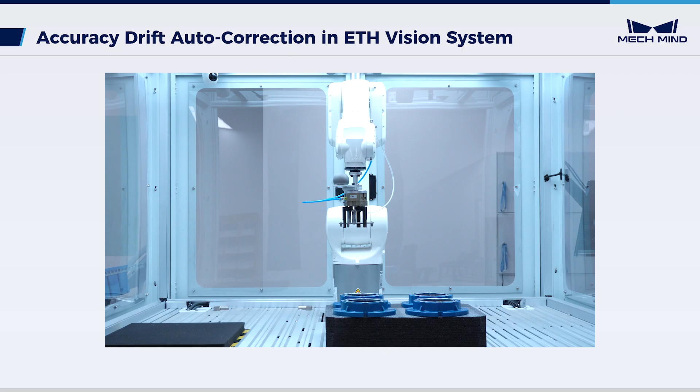This video introduces the deployment of accuracy drift autocorrection in the eye-to-hand vision system, using the example of picking neatly arranged housings. By deploying this, you can avoid decreased picking accuracy due to temperature changes. Additionally, by setting a correction cycle, you can achieve long-term picking stability.

Before deployment, make sure that the workstation has a solution for picking. Confirm that the accuracy of the camera, robot, and extrinsic parameters have been checked, and ensure the robot can accurately pick the target objects. Make sure there's enough space for mounting the calibration sphere.

Now, we can start the deployment. Here are all the steps for deploying accuracy drift autocorrection in the eye-to-hand vision system.

Let's begin with the preparation. First, check the items for deployment. Open the eye-to-hand kit packaging box and take out the items, including a calibration sphere, a soft nozzle air blower, and others.

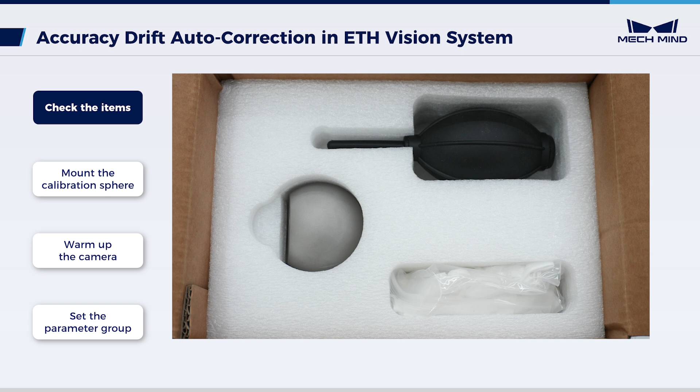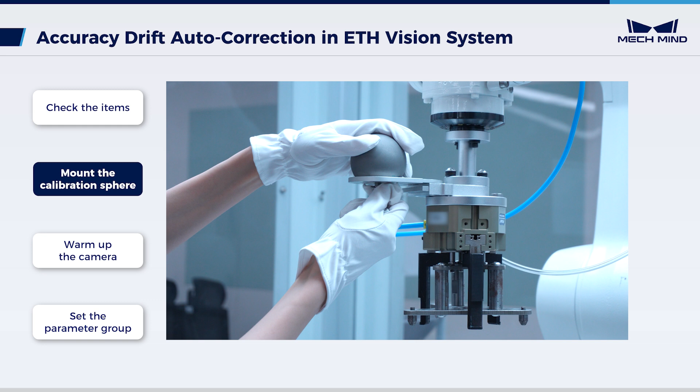Start by mounting the calibration sphere. In the eye-to-hand setup, the calibration sphere should be fixed to the end of the robot's arm, such as on a sturdy gripper or on the flange plate.

Make sure that the calibration sphere can reach all the areas where the target objects will be picked, and that it remains in the camera's field of view when moved. In scenarios where the robot needs a large or long gripper for picking, avoid any collisions between the gripper or calibration sphere and surrounding objects.

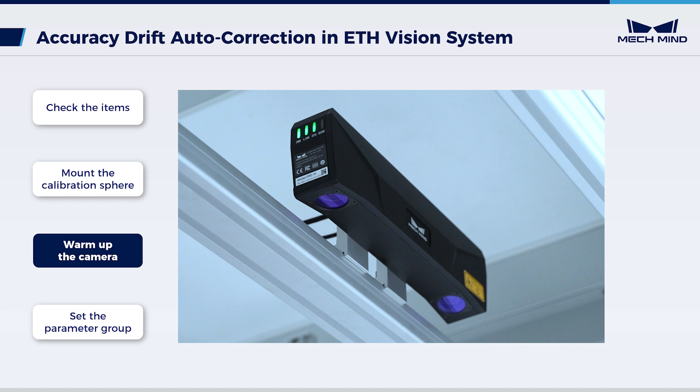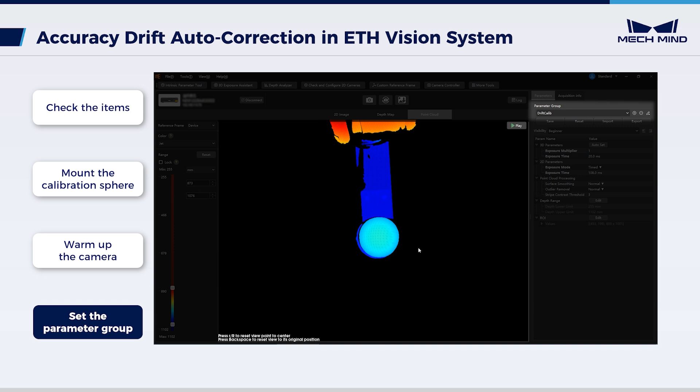Next, warm up the camera to prevent changes to the intrinsic parameters due to temperature fluctuations during data collection. Then, set the parameter group in Mech-Eye Viewer to ensure that the point cloud of the calibration sphere remains smooth and intact. Now that the preparation is complete, let's move on to deploy the drift autocorrection tool in the software.

Open Mech-Vision. Navigate to Toolkit. Click Error Analysis Tool, and then Autocorrect Accuracy Drift in Vision System. Select Autocorrect Accuracy Drift in Eye-to-Hand Vision System. The 4 steps for tool deployment are displayed in the deployment wizard.

Click Start and begin collecting workstation data. Enter the workstation data to calculate the number and distribution of the image capturing points where the calibration sphere images are captured. Connect to a camera.

Select the project for picking. Select the corresponding calibration parameter group. Choose the parameter group configured earlier in Mech-Eye Viewer. Next, set the reference object. In this video, we use a 40 mm diameter calibration sphere for demonstration.

Then, set the scenario of the scene. In this video, housings are neatly arranged in one layer. Thus, choose one for the object layout.

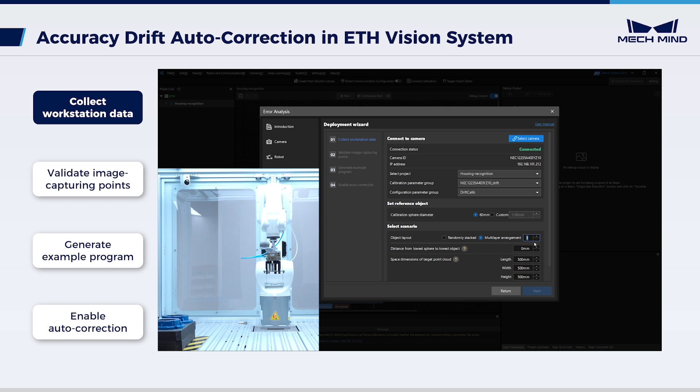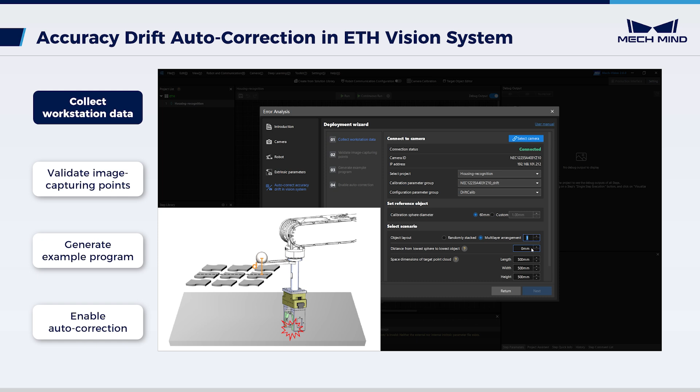Move the calibration sphere to the position of the bottommost workpieces. If there is a risk of collision between the gripper and objects below, you will need to set the distance from the lowest sphere to the lowest object. Please fill in this data based on the actual situation.

Next, fill in the space dimensions of the target point cloud, which refer to the dimensions of the point cloud model of the target object within the workspace. Enter the length and width of the working space according to actual situation. In this scenario, since the housings are arranged in a single layer, the height of the target point cloud is equal to the height of the housing's point cloud in one layer.

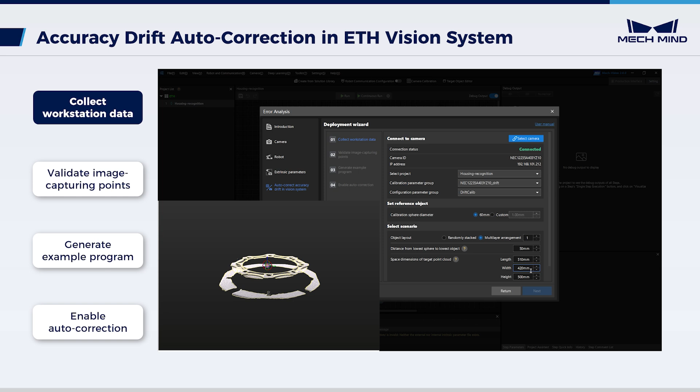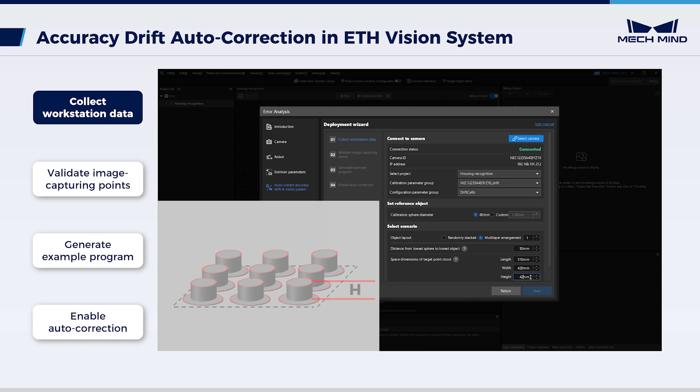For housings, the point cloud model is created using multiple layers of the surface point clouds. The height of the housing's point cloud is the distance between its upper and lower surfaces. Therefore, the height of the workspace here is the actual distance from the upper surface to the lower surface of the housing. Once completed, click Start Calculation to compute the number and distribution of the image capturing points for the calibration sphere. Next, validate image capturing points.

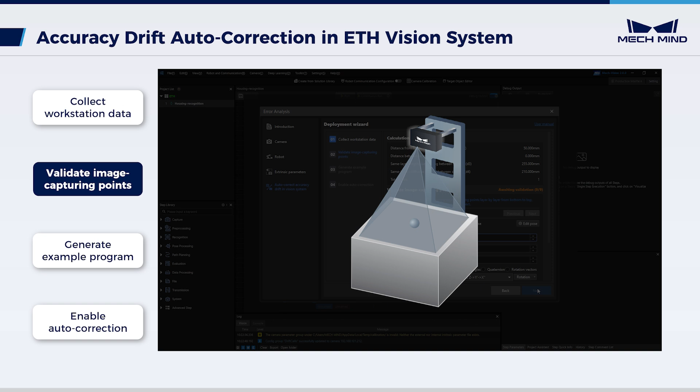Calculate the repeatability of the poses of the calibration sphere from each image capturing point, to ensure accurate and reliable data for accuracy drift correction. In this step, you can see the calculation results, and also the number and positions of the image capturing points. Based on these results, you can determine the positional relationship among image capturing points.

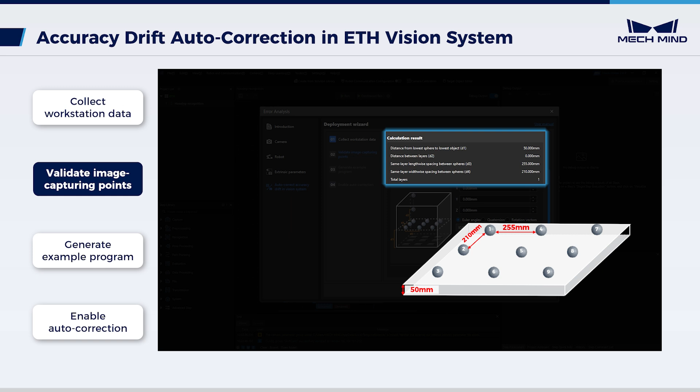According to the illustration, move the robot to 9 validation positions in sequence. After reaching validation point 1, record the robot flange pose in the software.

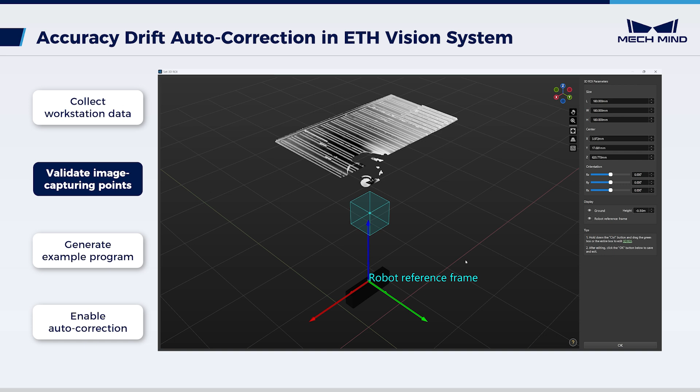At this point, adjust the ROI of the sphere to ensure that the sphere can be repeatedly and accurately recognized. The ROI must fully enclose the calibration sphere, leaving a margin equal to the sphere's diameter on all sides. Once done, click Capture Image to validate.

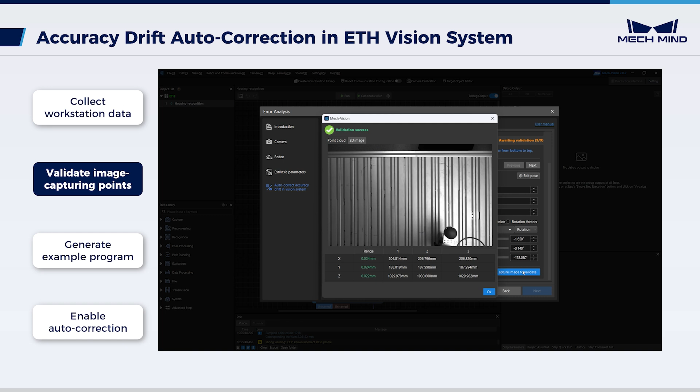In the pop-up Validation Success window, you can view the 2D image and 3D point cloud of the calibration sphere. Click OK to proceed with validating the remaining points. Move the robot to the remaining image capturing poses, and record the poses for validation.

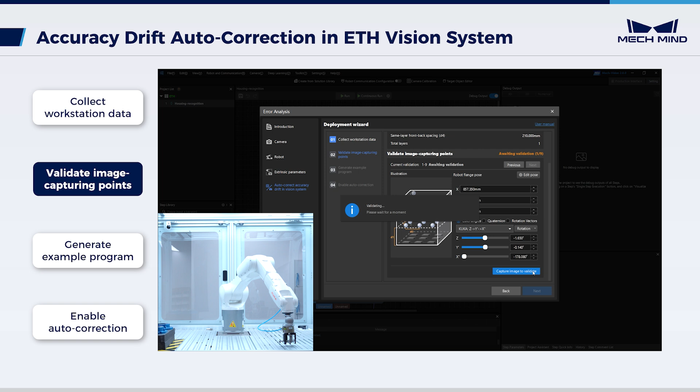Afterwards, click Next to enter the interface of generating example program. The result of the validation points are displayed here in the list. Based on the results, a robot example program will be generated by the Drift Autocorrection tool.

You can select the robot brand in use and export the example program, which will assist in the subsequent drift autocorrection. In this video, we use a KUKA robot as an example. If your robot is not in the list, you may skip this step and write the robot program manually.

Finally, enable autocorrection to correct the accuracy drift during actual production. Navigate to the project interface. 2 new projects appear in the list.

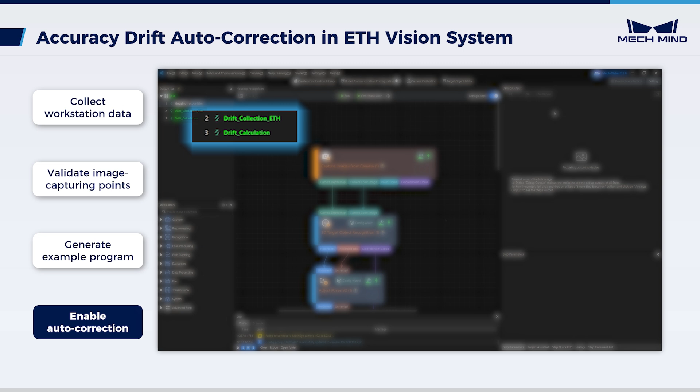The first project is used for collecting the calibration sphere's data, and the second one is for generating the system drift autocorrection model. To ensure that the picking solution can correct accuracy drift with the autocorrection model, it's necessary to select Autocorrect Accuracy Drift in Vision System in the Output step.

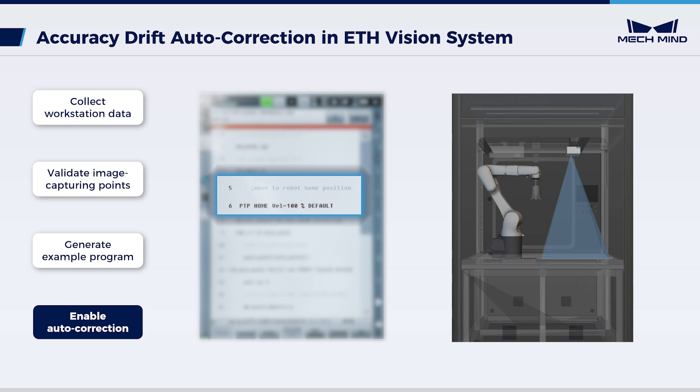Next, load the example program to the robot system. After loading the program, teach home position manually. In this position, ensure that the robot does not block the camera's field of view and that no collisions occur when the robot moves to the first image capturing point.

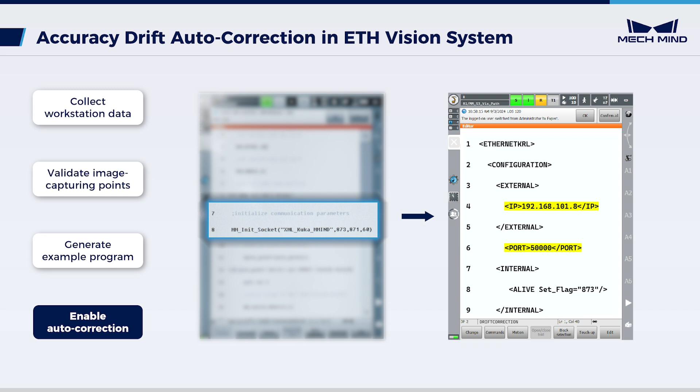Then, confirm that the IP address and the port number in the XML file for this command match those used in real-case scenario. Next, run the drift correction program to test whether the robot triggers the project to generate calibration spheres poses and the drift correction model.

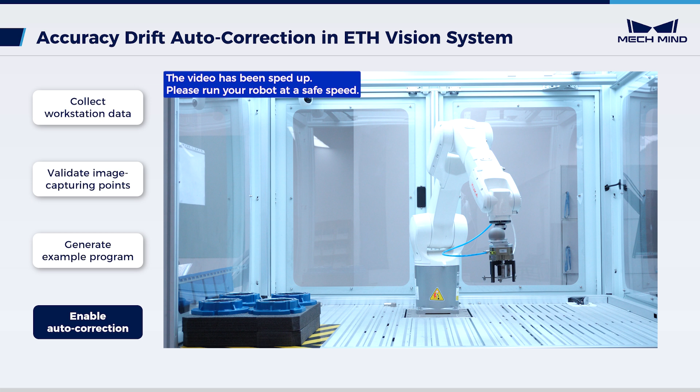Finally, verify the effectiveness of the deployed drift autocorrection solution by performing a test picking. Run the picking program. If the robot can accurately pick the workpiece, the deployment of the system drift autocorrection in eye-to-hand vision system is proved successful.

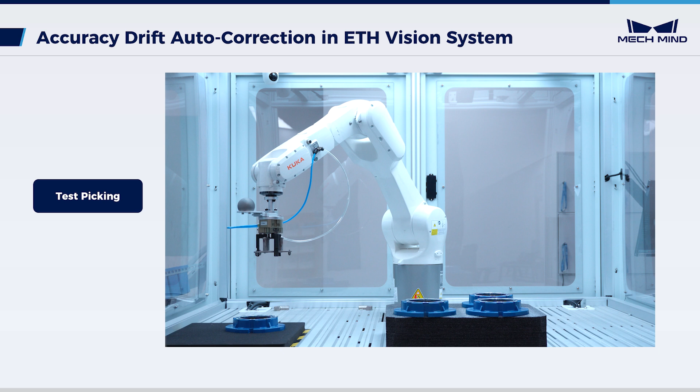To ensure long-term stability of the actual production, configure the drift alert threshold here after testing picking. Normally, the threshold is suggested to be set at 10 mm. If the actual drift exceeds this value, check the stability of the camera, the tool, and whether the robot's 0 point has been lost.

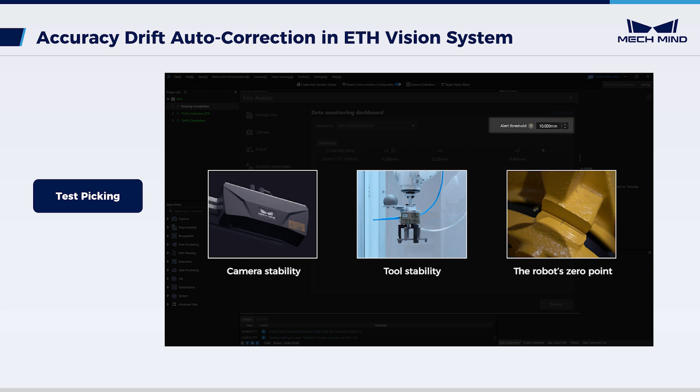These are all the steps for the deployment of system drift autocorrection in eye-to-hand vision system. The autocorrection cycle can be set based on the site situation. It is recommended to perform drift correction at least once a day before production.